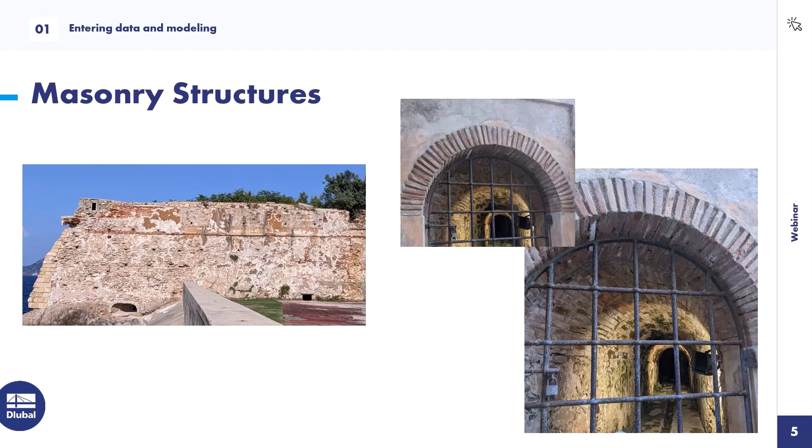This is the reason why I prepared two examples today: one structure as a basement with an arched surface on top, and a second, simpler example of a bridge, where I want to show how you can estimate the maximal possible load on this structure using the stability analysis tool.

That's all for the beginning. So let us start and switch to RFEM.

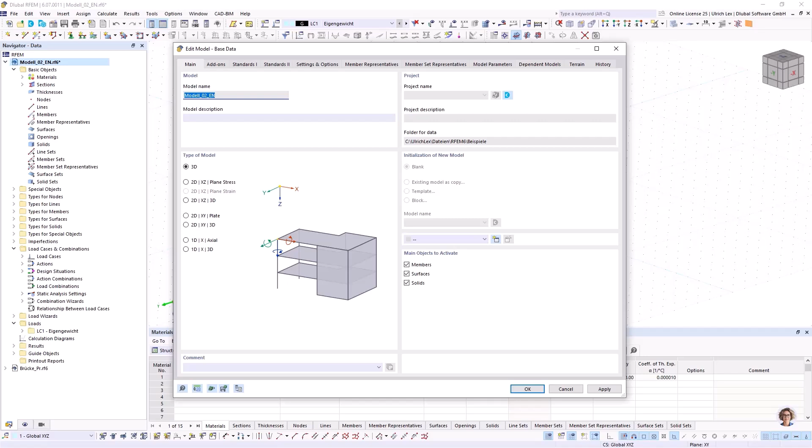I already created a new file in RFEM. The first thing I want to do is take a look at the base data, on the main sheet there are no changes to the default settings. What I want to take a look at is the add-ons. Here I have to check our masonry add-on to get the things I need for masonry.

When I have done this, I can continue with creating new things. At the beginning, I want to create a new material. One material already exists, it's a concrete, and I want to use it for the foundation maybe. The second will be created new. I choose the material type masonry, and here our material model, orthotropic masonry.

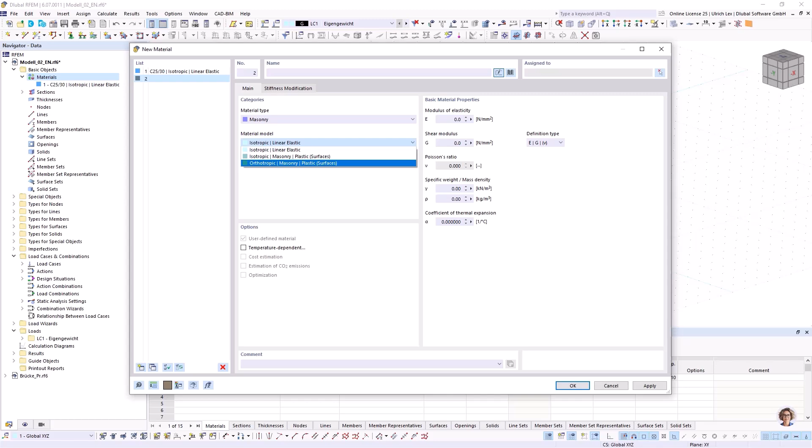Go to the material database, select our masonry, and select one special material. Continue with OK. Then my needed data are filled in automatically, along with the parameters I need for the material model. The first step is done, the material is created.

The second step, I want to create a new thickness for my surface. At first, the foundation, maybe 250 millimeters. Apply, create one new thickness with masonry, and set the thickness. Continue with OK. If I have done these settings, then I can start modeling.

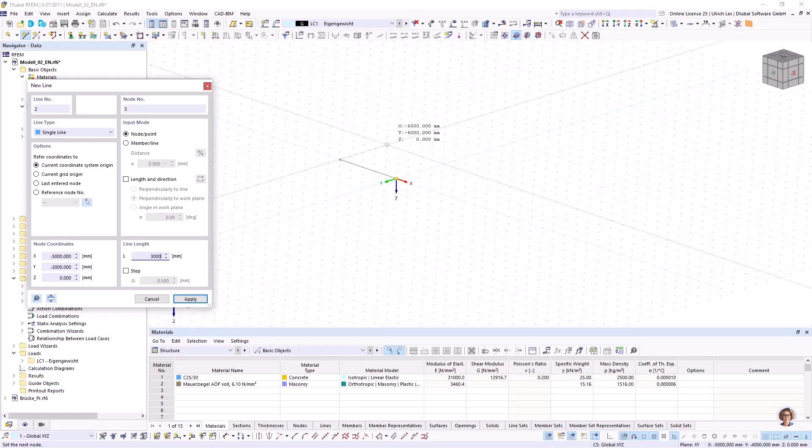My building is very simple, so I can create it only with lines or directly with surfaces, and I don't have to use any data import or DXF file. So I want to start here and have, in this direction, 5000, here 3000 millimeters. I can also change this from millimeter to meter, which is maybe better for bigger buildings.

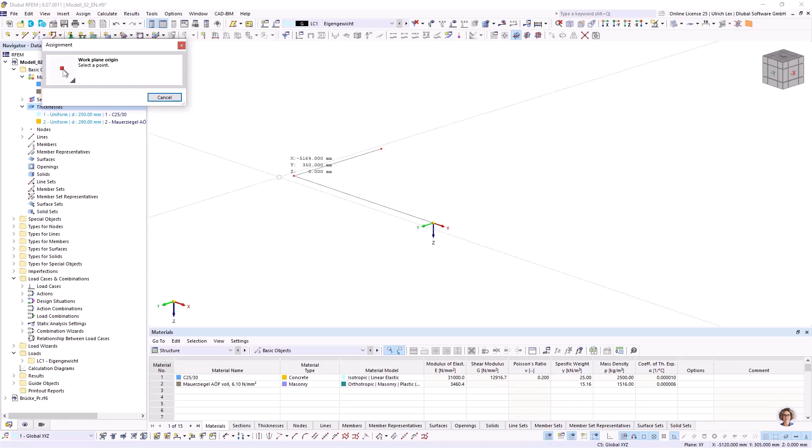So I can copy this line and create the line in the front. I can switch the working plane. I had to change here the settings in options, units, and the length from millimeter to meter.

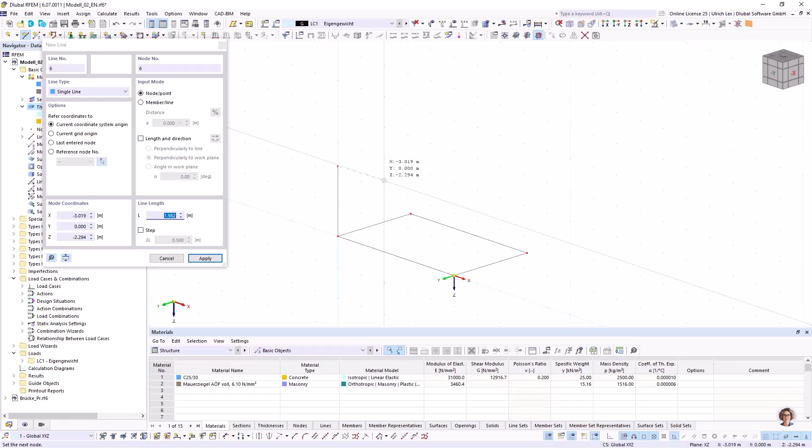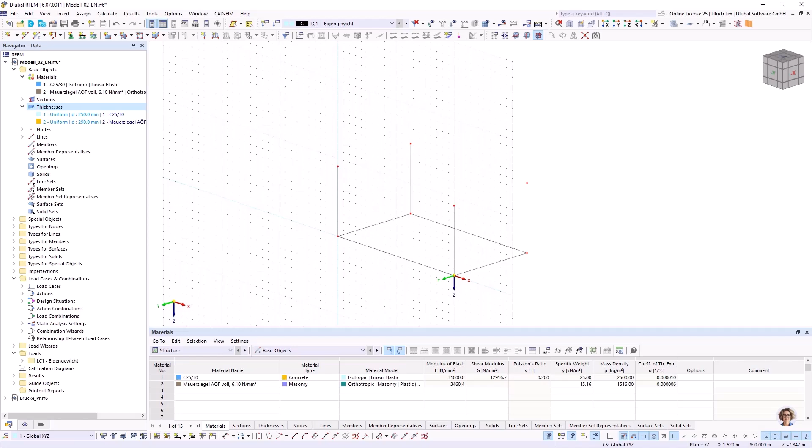Now my spacing is 1 meter. So now I can change it, that was what I wanted. Switch my working plane and want to create here one door.

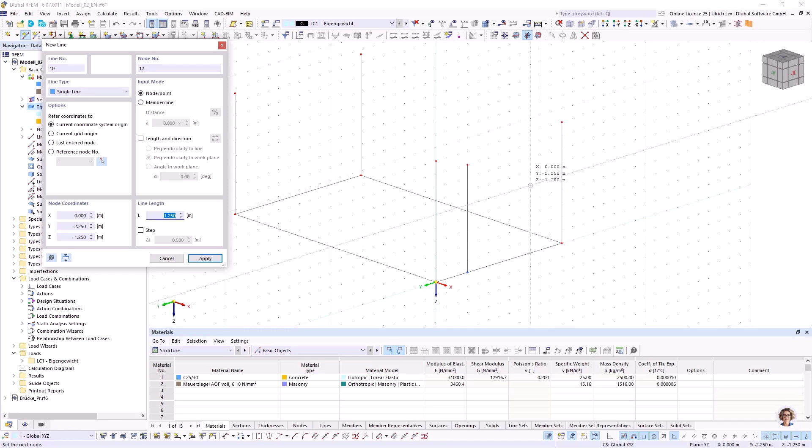For better modeling, I can now select only the lines in the front, and create a new arc.

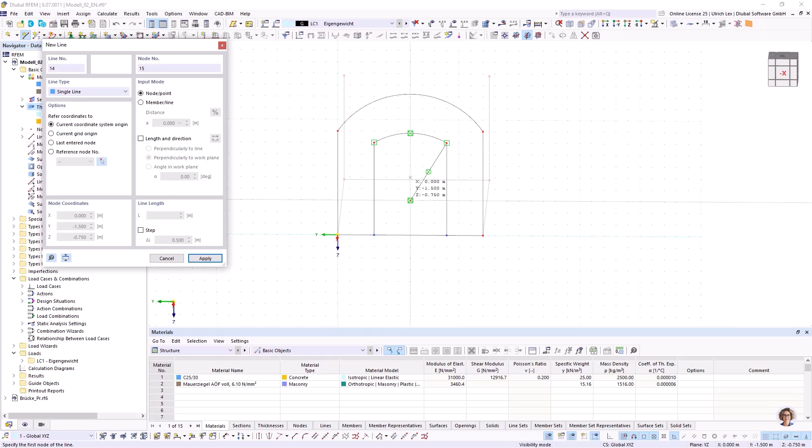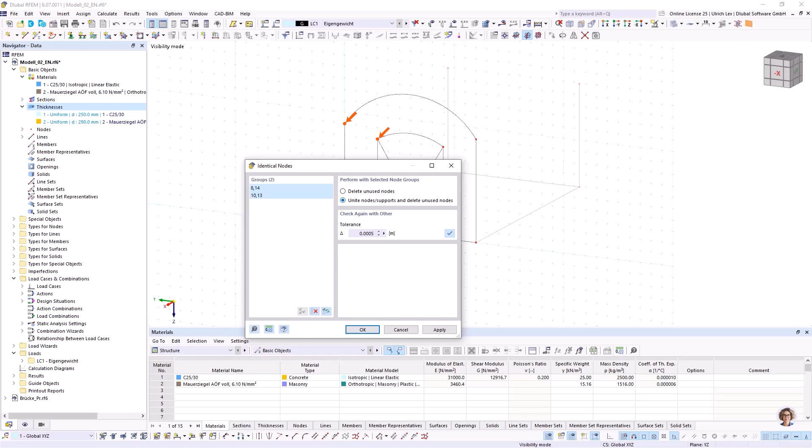Can create here now 2 lines, maybe 2 helper lines. There were created 2 additional nodes. This is not good, so that's why I can use our tool, model check, and look after identical nodes. You see there are 2 nodes here, and I can use this option, delete the unused nodes. Okay, then there is only 1 node.

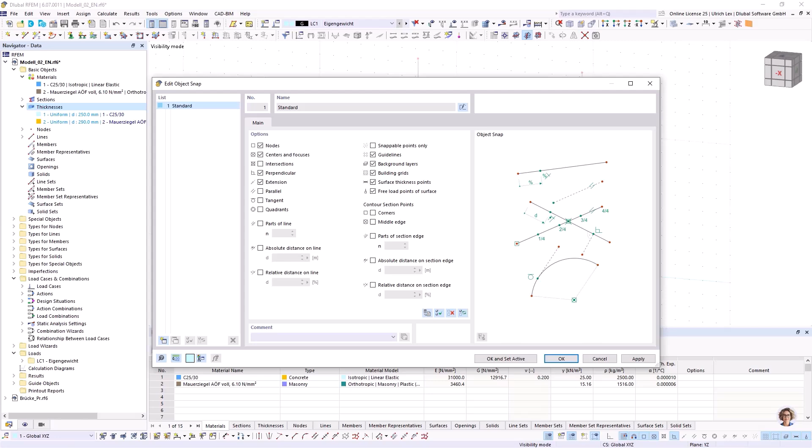Available. Here I created this helper lines. I can activate our extension for lines. Then I can choose this node, go a little bit back. When the yellow cross is coming, then I can extend this line and choose my length. The same on the other side, a little bit back, and extend this line.

And the next steps, I use this arc again. So after this, I can delete my helper lines.

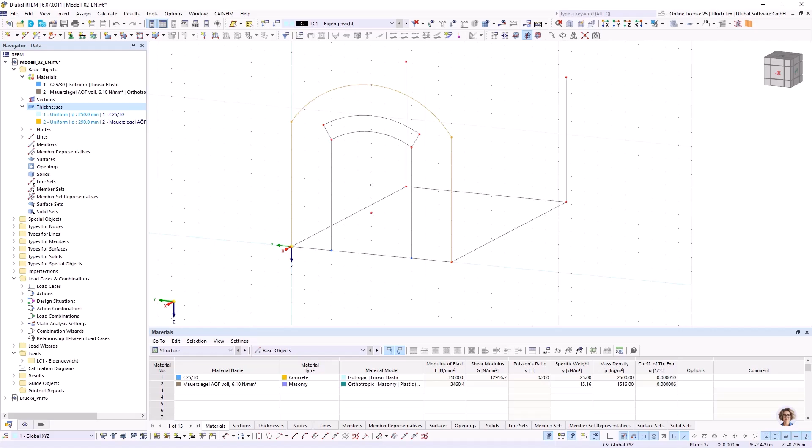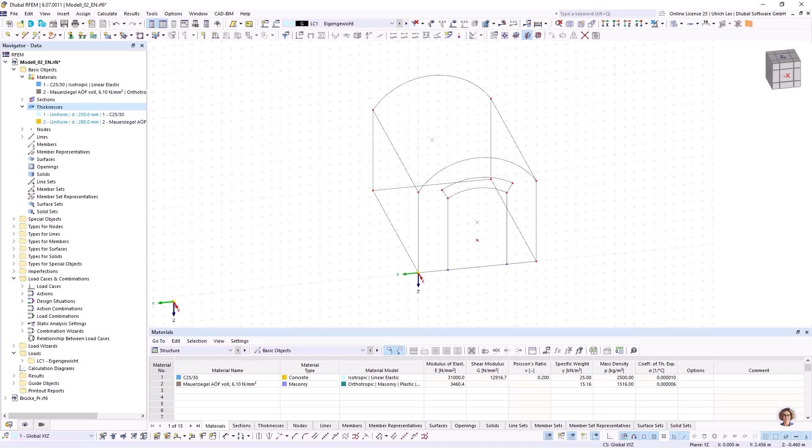So that's easy modeling. I can cancel this visibility mode. I can select the structure and copy it. I can add here some lines. And my easy building is ready. I can save this structure, and after that I will continue with creating

the surfaces. I use here the option select boundary lines because now all boundary lines are available. For my foundation, I use the concrete material. Select here my lines.

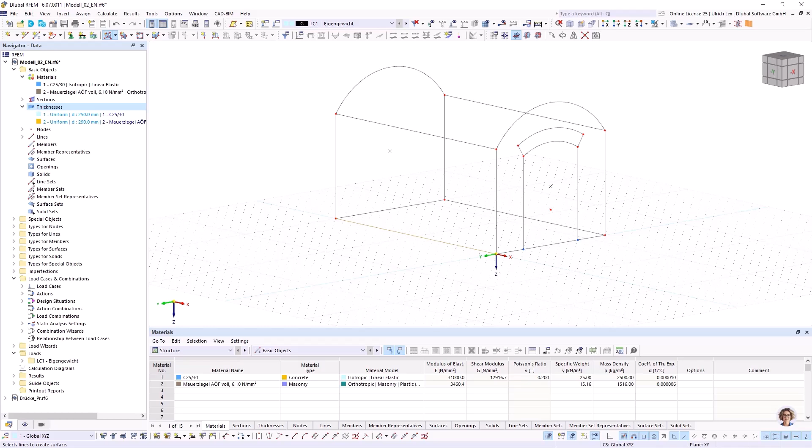So one thing I have seen, here are automatically created nodes on lines. Maybe it would be better to have separate lines, so I can use this option connect lines and nodes. After that, the line is divided and the node is displayed as a red one.

I continue with select boundary lines, choose my thickness for material, masonry, and can create some masonry surfaces in an easy way.

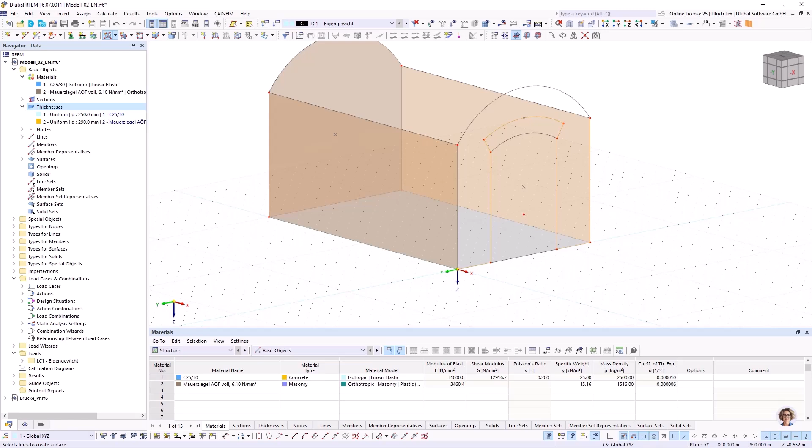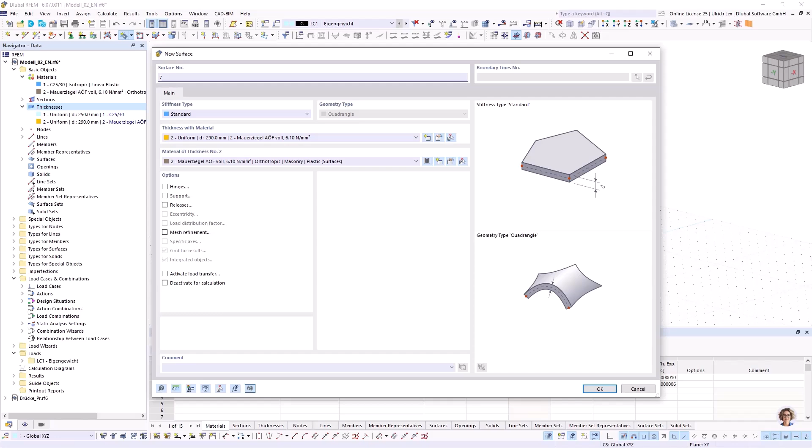So here I want to create a separate surface, and also for the surface on the top I need not a plane surface, I need here a quadrangle surface, also with the thickness of the masonry material. Okay, and choose the boundary lines, and ready is my easy building.

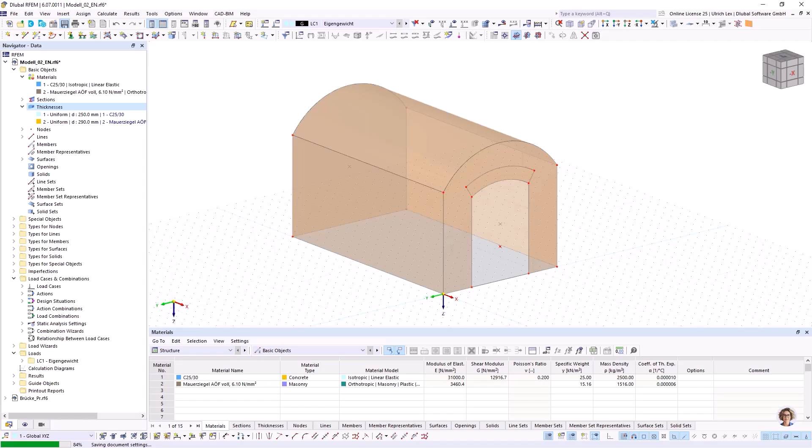So as a next step, I want to take a look at the supports. With double click on the surface, I choose a rigid support.

So a special thing for masonry material is to take a look, one view on the axis systems of the surfaces. For interpreting the results, it would be better that the local Z direction is oriented to the same direction. Maybe it would be good if all surfaces, maybe from the wall, are oriented to the inside of the building or to the outside of the building. So I can explain it later better, because we have here results for the minus side or the plus side, and this is connected to this local Z-axis. So I want to change it, that all Z directions look to the inside of the building.

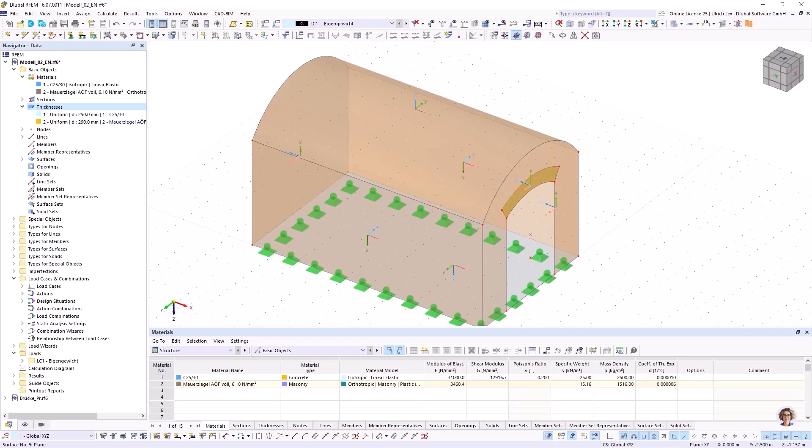Here it's okay. Right click and reverse the local axis system.

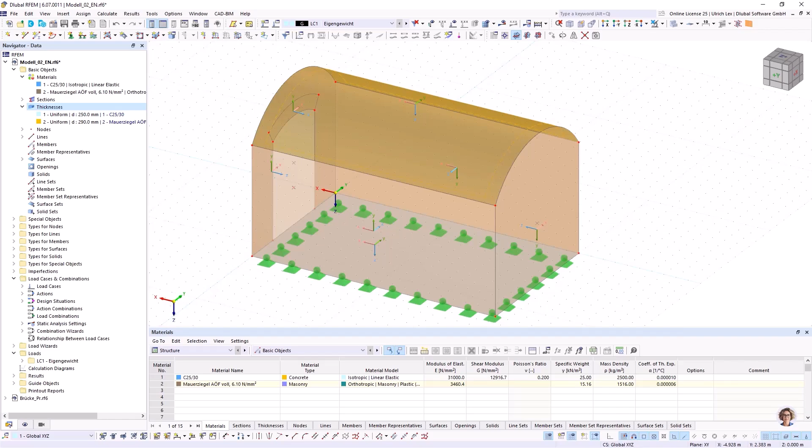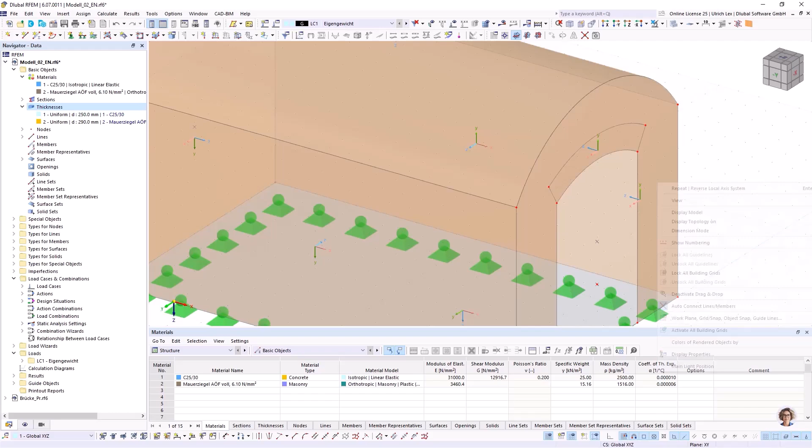And at the last, what's this? Okay. So for this arched opening, it would be good when the y direction of the surface would be oriented to the arch.

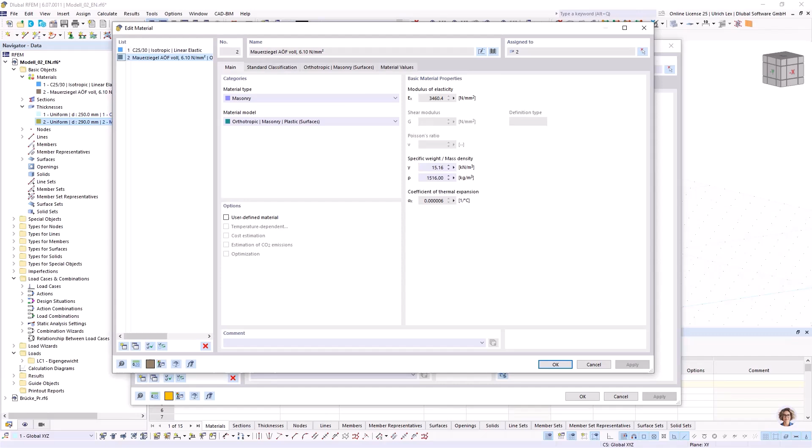This can be done when I go double click on the surface and take a look on this specific axis, input axis, use here axis parallel to lines, can choose my y axis and can define that it should be parallel to this line number 11. It is necessary because the masonry material does have two directions, and the y direction is normally the strongest direction, and this is the direction what the load should be acting.

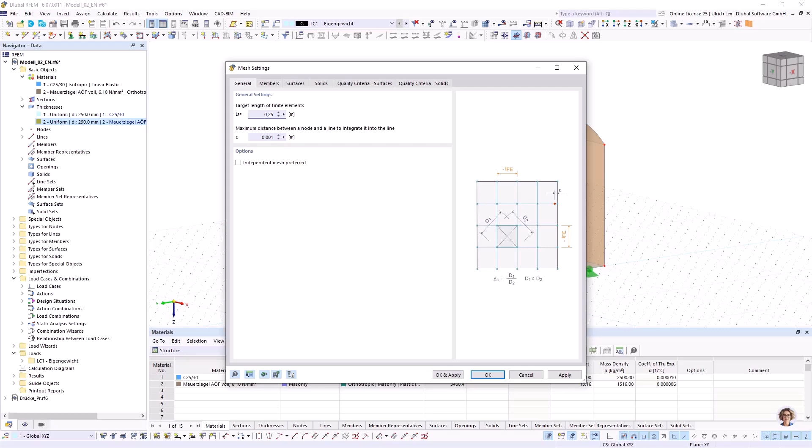Okay, as a next step, we can take a look at the mesh settings. The mesh settings of masonry structures should be around 25 centimeters. Of course, it can be necessary that this length has to be smaller. Then you can use this member or this mesh refinement, or it can be necessary that the mesh is bigger. But normally it should be used about 25 centimeters.

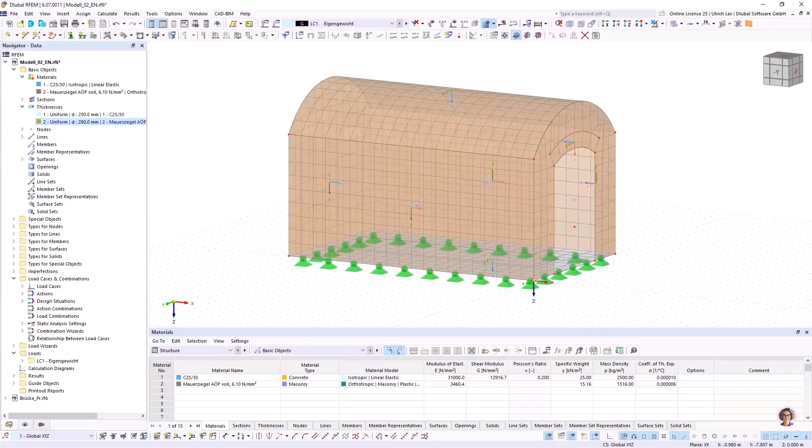Okay, the settings are done, then I can take a look at the mesh. Continue with OK. The mesh will be generated, and the mesh is fine. It's a regular mesh, so I think it is okay for this structure.

Here we see, when I separate this surface, we can see that the y direction is oriented according to line number 11, and it's better to see when I activate the axis system of the FE elements. Then we can see this y direction is oriented according to the line.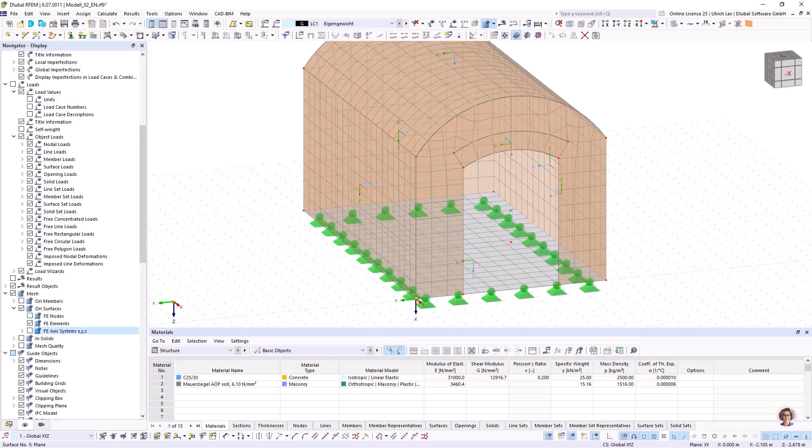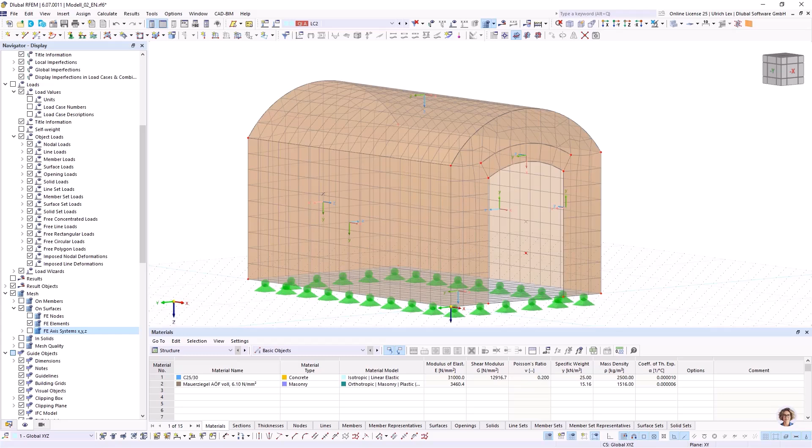Okay, the next step is loading. Here I want to create a second load case. The first load case is my self-weight. As a second load case, I want to create a surface load with 10 kilonewton per square meter acting as projected on an area.

The load combinations are created automatically. Here I want to modify the static analysis settings. For masonry, it's normally used a geometric nonlinear calculation or large deformations.

And it's important to set some load increments so that the whole load is not acting at one load step on the FE element. It's better if you choose here maybe 5 increments. When you want to see the results of each increment, we have the option to save the results, but you have to activate it.

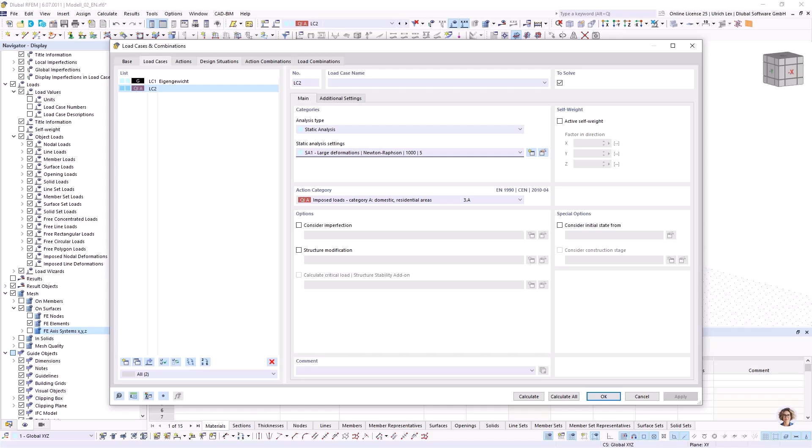Okay, and also we have to set in the combination wizard that we want to use not second order, that we want to use the large deformation analysis. After this setting, we can continue with calculation of the structure. So I press calculation.

At the calculation diagram, you can see the method of analysis, large deformation. You can see the load increments where the solver is computing. You can see this load factor, and in the convergence diagram you see the displacement, the deformation of the system according to the load or load increment.

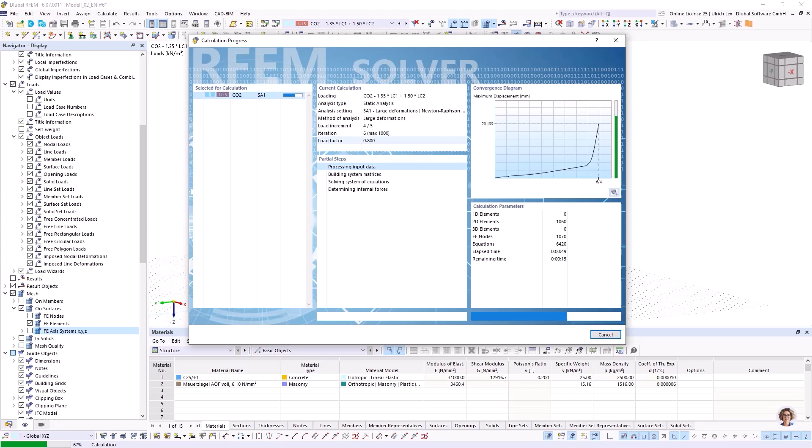Now we can see that the displacement, the deformation is increasing with the load factor, 0.8. We could now wait until the calculation is finished, but it could be that we have to wait a long time and the calculation will not finish. So I will remember 0.8 and will cancel this calculation at this moment.

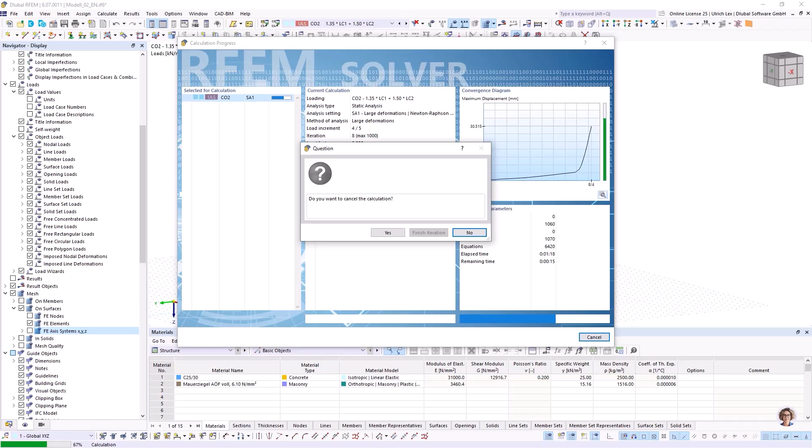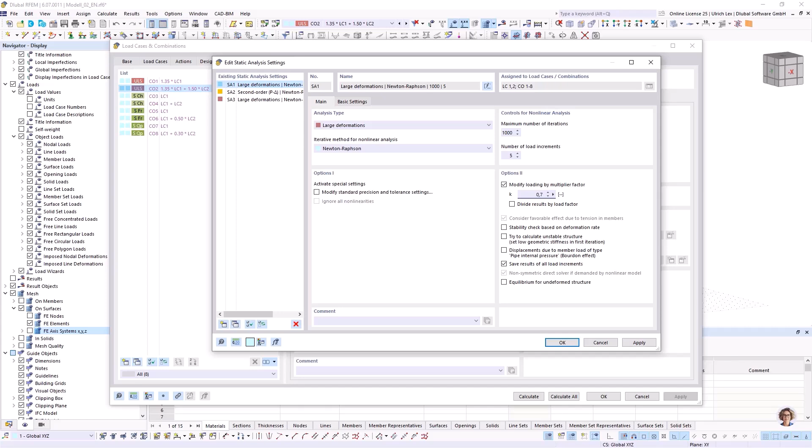What can I do to take a look at the deformations at this load factor? I can go to the load combinations, choose the option in the analysis settings, use this modify loading by factor, and insert here maybe 0.7. Continue with OK and want to calculate the structure again. Then we can take a look at the results after this load factor 0.7.

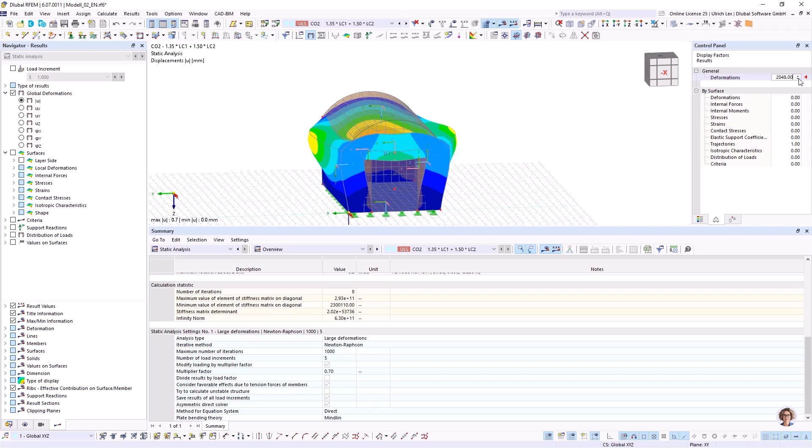What we see now, when we increase the deformations, what is happening? The surfaces on the right and left side get a big deformation. I think it's clear because this arched surface creates some horizontal load, and the masonry on the side surfaces can maybe not handle so big horizontal loads.

So maybe when we have to compute the structure in reality, maybe we have to think now if we forgot something, or what we can do so that it's working again.

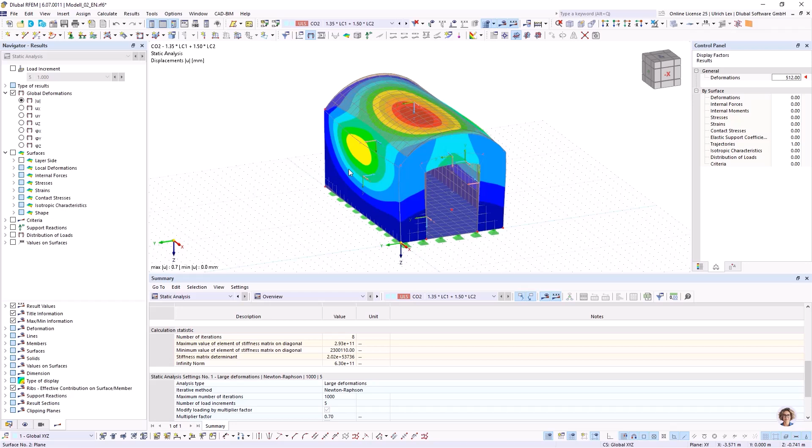There are many possibilities. Maybe we can create a new beam, a concrete beam, like a ring beam on the top of this surface. Maybe you can create some additional concrete column, or what could be done when it is a basement.

It could be maybe considered the earth pressure on the outside of these surfaces. And that was what I want to do.

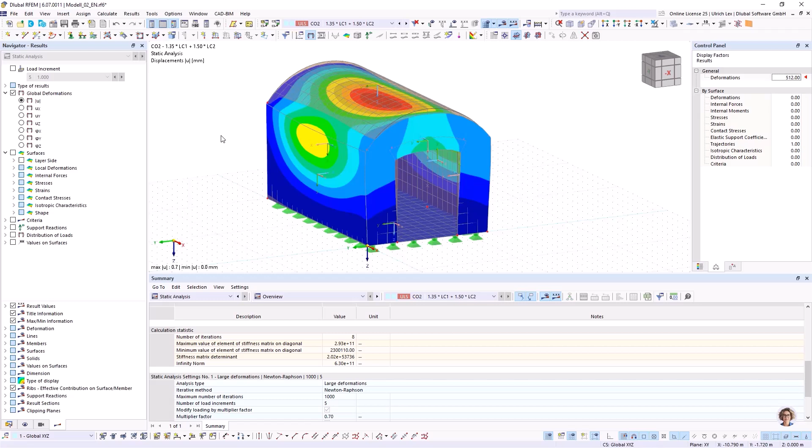Now, with double click, I want to consider some support. I want to create the new supports in local Z direction. Maybe some spring constant. Yes, okay. And the same on the other side.

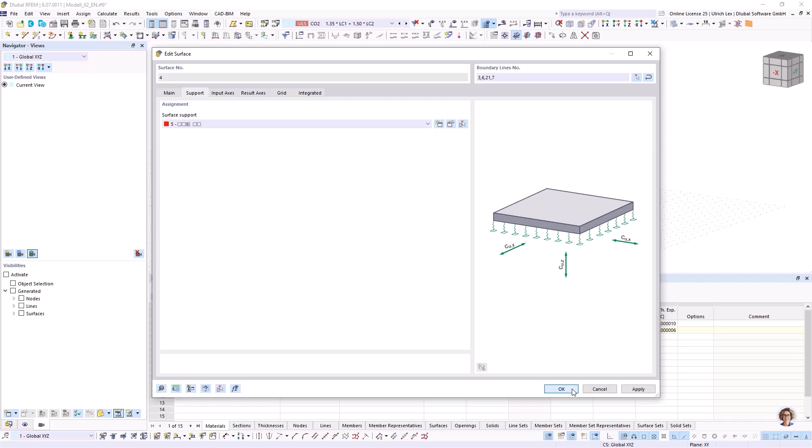I want to change back my factor to 1.0 and calculate the structure again.

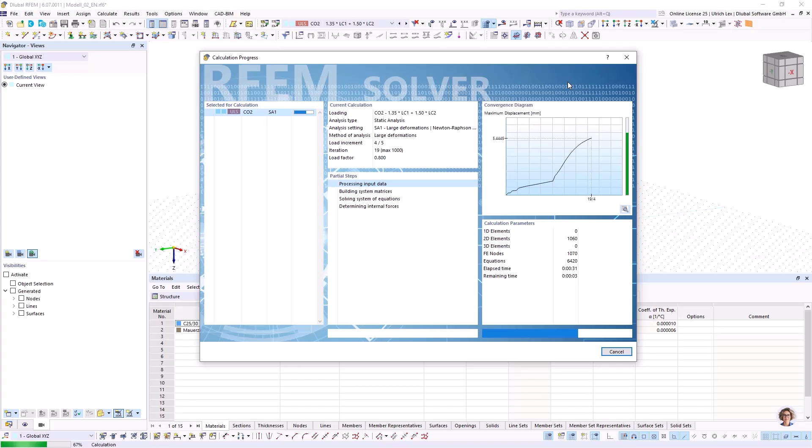Now I can see that the deformation is increasing too, but it's getting horizontal after some time. That means that was the right thing we have done. Here is the last load step, and we got more load, and the deformation is not increasing anymore. So the structure is computed, and this structure is okay for this load which is now computed.

So what can we do now for the result? The first thing is we can take a look at these load increments, but we have done it before.

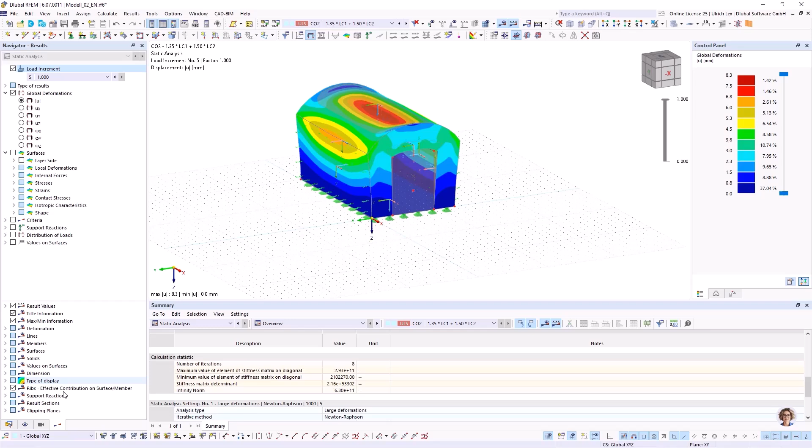One interesting thing is the deformations. These deformations you can also print to the printout report to create maybe a better view. You can insert some guide object and a clipping plane. You can create a new clipping plane here maybe.

Okay, just a moment. We have to see the YZ direction. And you can take off the clipped areas, so you can see this deformation.

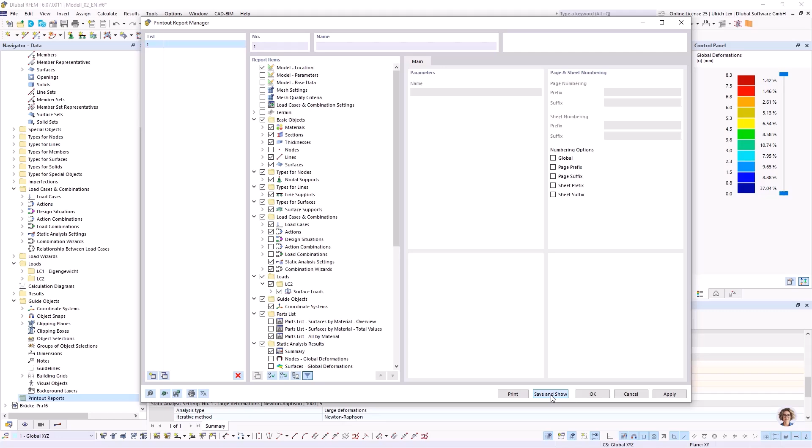We can create here a new printout report. Some tables are activated by default. Here you can activate or deactivate everything you want. Click on Save and Show, and the printout report will be generated.

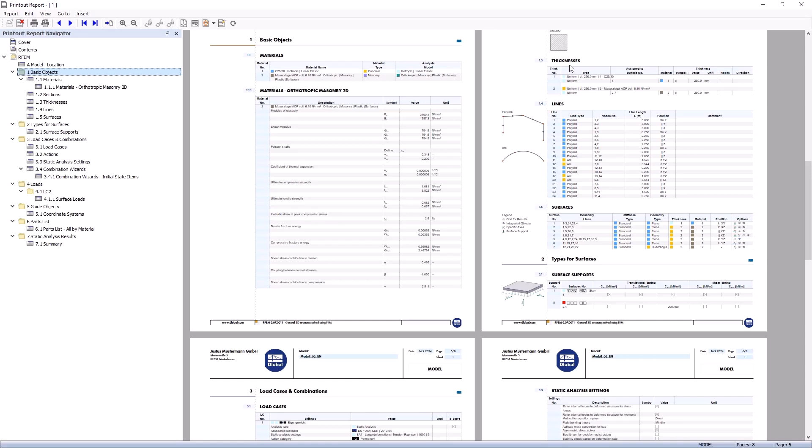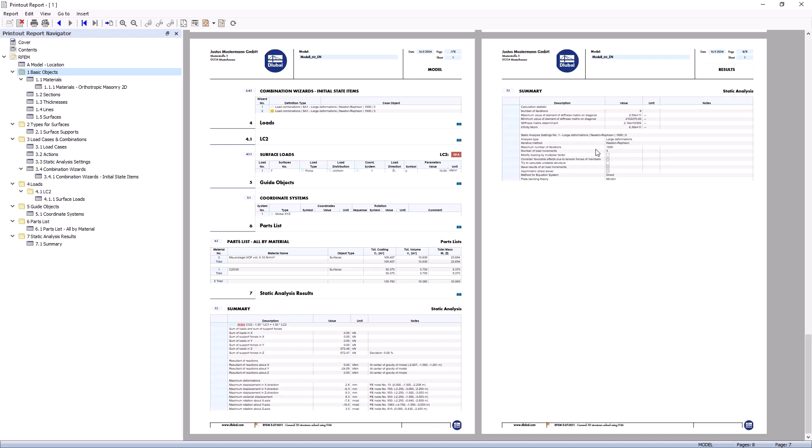Here you have the basic information: materials, thickness, lines, surfaces. You have the information about the load, and you have the information about the static analysis settings. Here you have the information about the calculations, that it was okay. You can additionally print the needed pictures to the printout report, print graphic to printout report.

You can do some settings. Okay, with Save and Show. Then the printout report will be open again, and you have this information in your printout report.

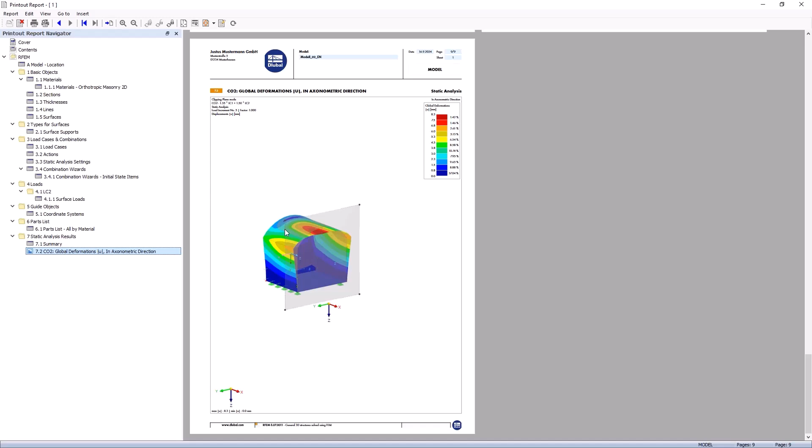So you can easily take the clipping plane off again. What is interesting is always the strains.

The basic strains may be in Y direction, and here we can see these plus and minus results. The plus results are always on the side where the local Z direction is oriented, and the minus side is the opposite. In our case, the results on minus are outside, and the results on plus are inside of the building.

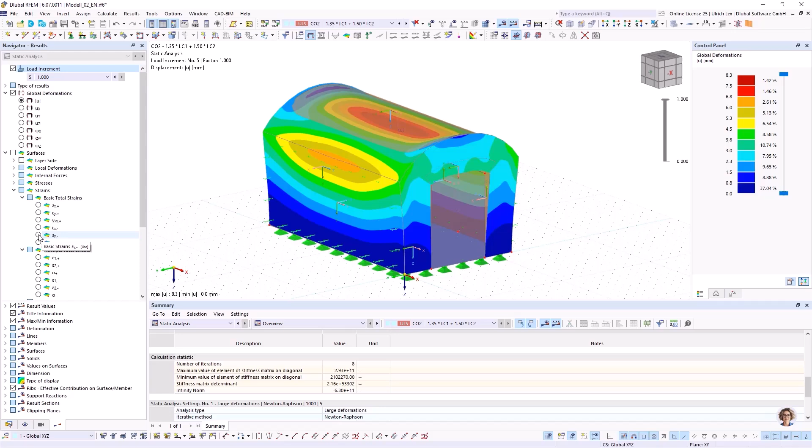When I take a look on these outside results, we can see that here is tension on this edge, and also on the inner side it is tension on the top of the surface. These results are as expected, I would say.

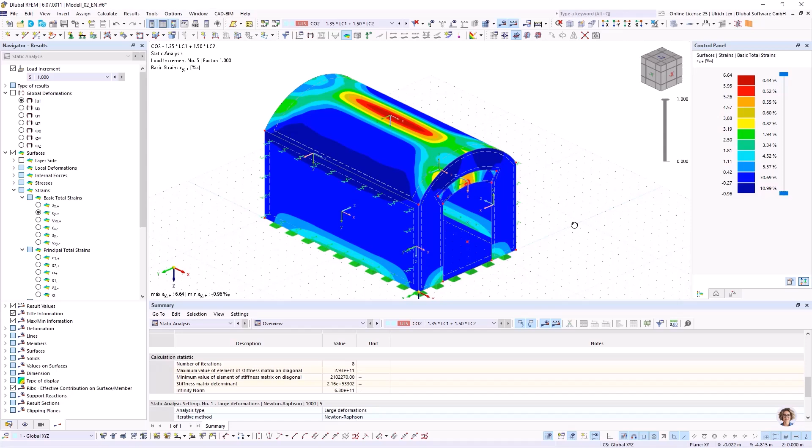Okay, when I take a look now on the outside and inside results on the same place, then you can see if there is a crack through the whole surface. But in our case, on the edge, on the inner side, it's a pressure, and only on the outside is tension.

That was all I want to say to this example, and I want to switch to the next one.

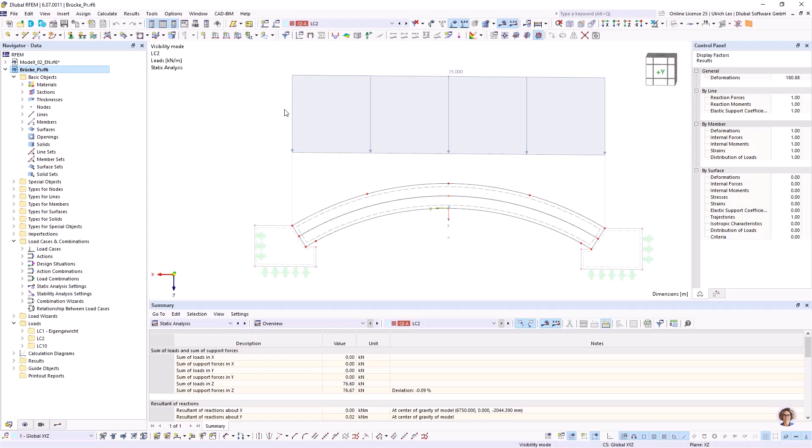Here I already created the file so that we do not have to model it. I created here something like a small bridge, I would say.

I have my arched structure on the side, some supports. In the middle of the surface, I create a result beam so that I can take a look on the normal forces in the arched structure.

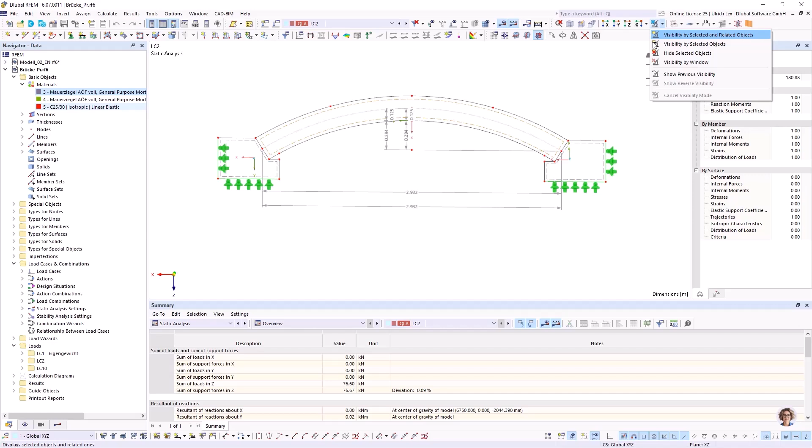As material, I used the same as before for both things. Here, just a moment, I switch off the member. The same material for both things. It's masonry.

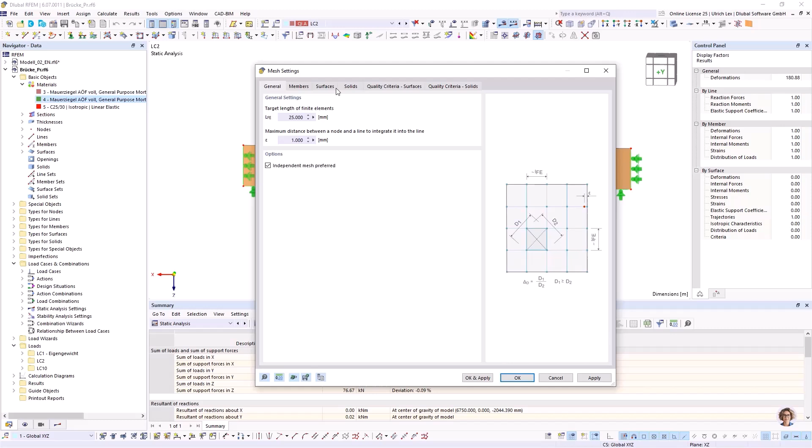For the mesh settings, I use now a very small mesh because I want to see some more details on the mesh, and I used it - it is now created as a section. So I have the thickness of the surface is in Y direction.

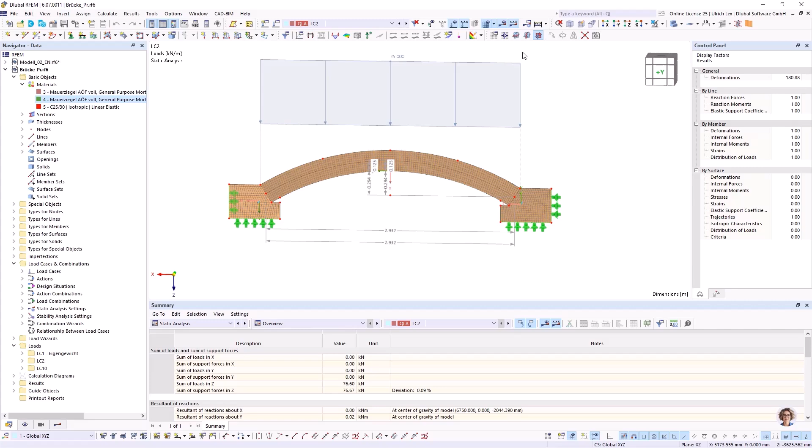As a load, I created only the same load cases, here with a load of 25 kilonewton per meter. So when I create this mesh, we can see that we have a lot of FE elements through the thickness of the surface. When I go back to my model before...

Here we have normally 9 layers through the thickness of the surface. When we take a look on the thickness, then we have 9 layers through the thickness, but we cannot show the results of each layer. We get only results on the outside, on the inside of the surface.

If it is necessary to increase this number of layers, we have this option to do it in the thickness. We can select this option and we can increase this number of layers from 9 to a higher number. But I think the default setting of 9 is okay, only in cases where I have a really thick surface, then you could think about increasing this option here.

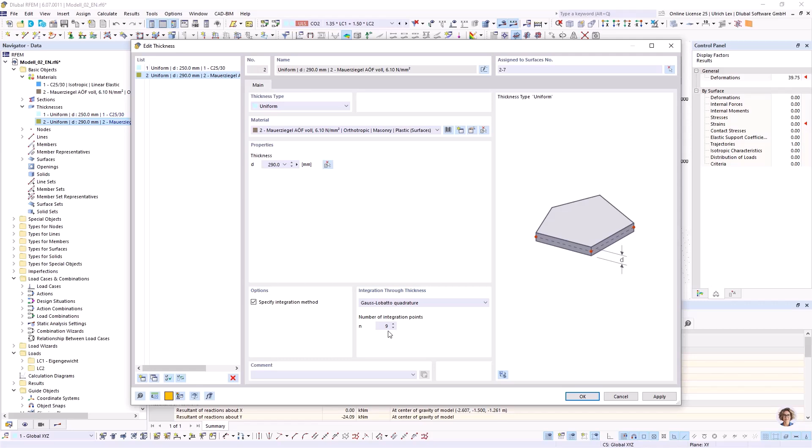So here I have this 25 as loading, my 25 kilonewton per meter. Then I want to know how much load is possible on my structure. That's why I used, in this case, a stability analysis too.

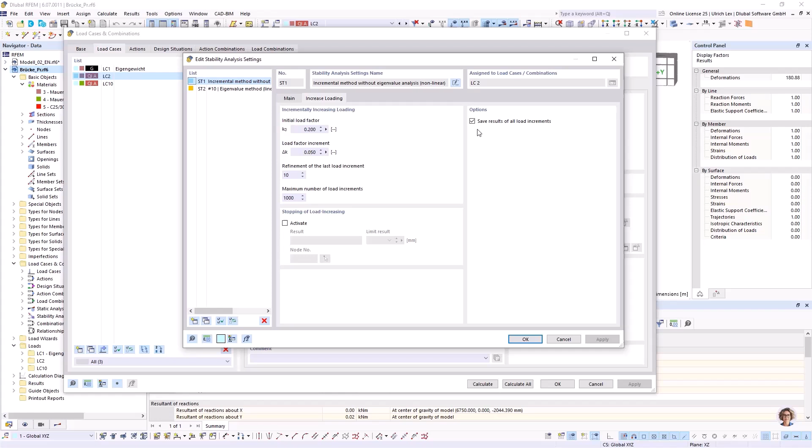I want to use the stability analysis and the incremental method. I want to increase the loading until the structure falls, and to see the results in each load step, I save the results of increments again.

If I compute this - I have done it before because this incremental load increase takes some time. But when I have computed it and take a look on the result, then I see that it is possible to increase my load with the factor 2.9.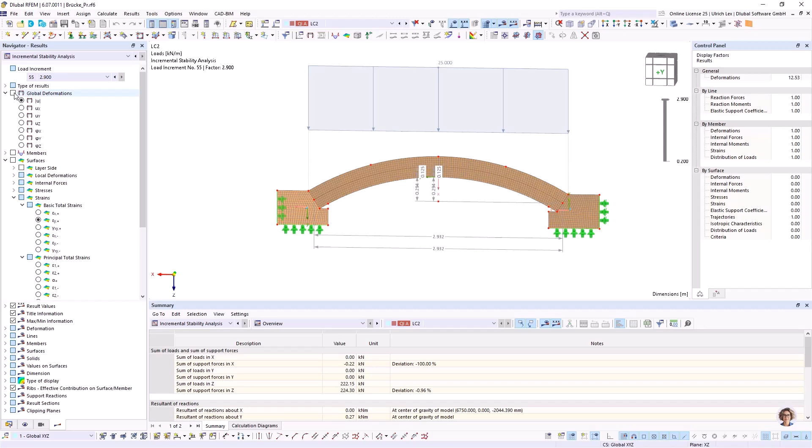And here I can take a look on my deformations. So when I go a little bit to the theory, I want to switch to my presentation.

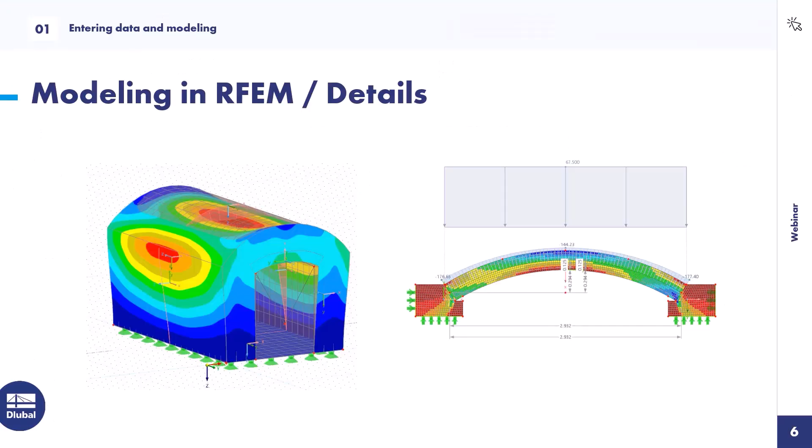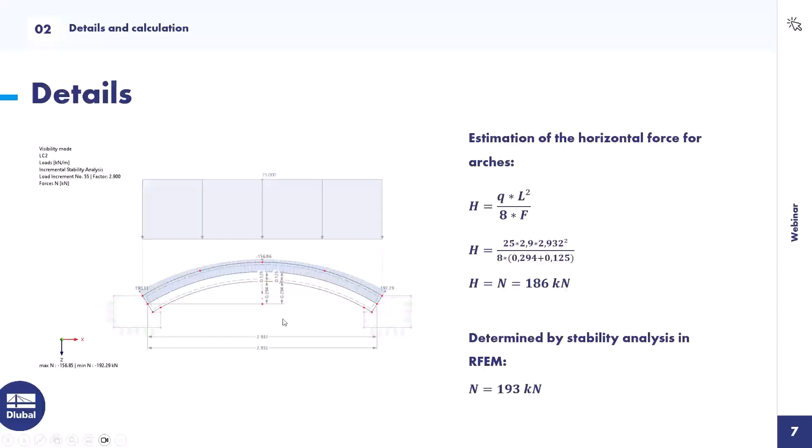It is possible to estimate the horizontal force or the maximum horizontal force for such arches by this formula. The horizontal load is the load Q normal times the length divided by 8f. F is the height of the arch, and I get with this formula about 186 kilonewton. In my case, I get by the stability analysis about 193 kilonewtons. That shows that the analytical solution is nearly the same as the computer calculation in RFEM. So I think it's a very good result of both ways.

I can here show the member force on my result beam and have about 193 kilonewton.

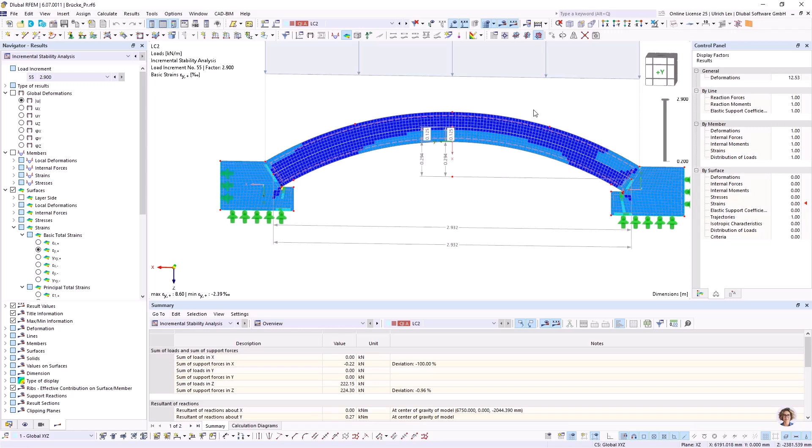So what is interesting again on the surface results? On the surface results, can we take a look at maybe first at the stresses. When I look at the sigma y stresses, I see a maximum tension of 0.098.

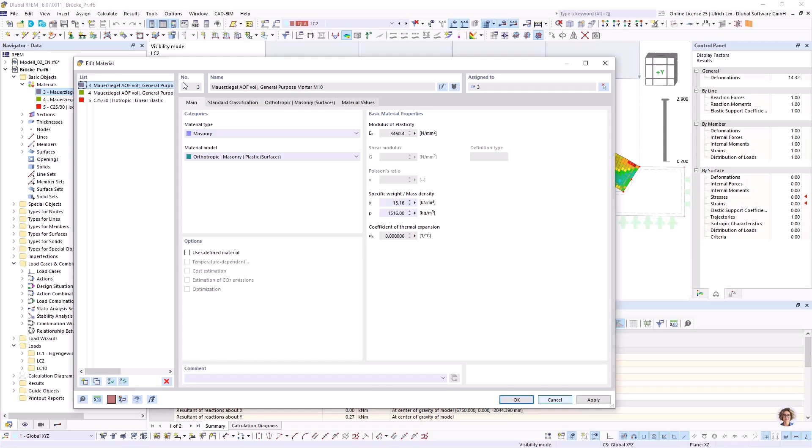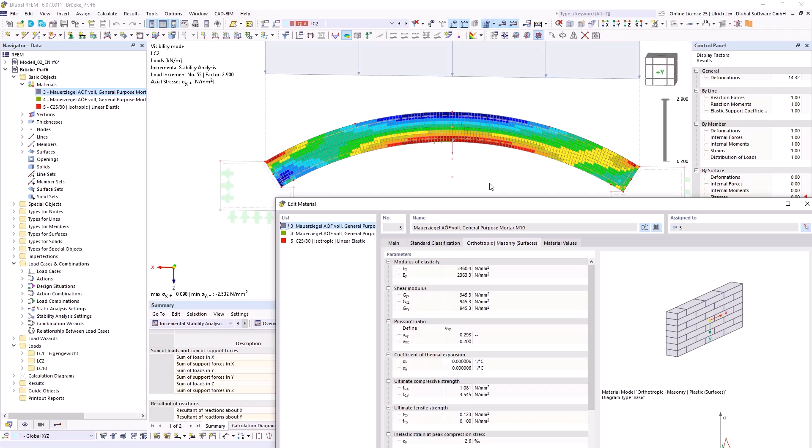When I take now a look on my material, then I can see that the maximum allowable stress is 0.1. So that's why the stresses are not so interesting, because the stresses cannot be higher than it is defined by the material. And if they are higher in the structure, then the calculation will fail and you are not able to compute the structure.

That's why the more interesting things are the strains. And here I can take a look on the epsilon y strains, and we can see that here on the downside are tension strains, and also here on the upside.

For documentation, can we now say, okay, here one FE element is about 25 millimeters. Maybe I have here 50 millimeters, 5 centimeters, where I have a tension, where I think cracks are possible, and the rest of the structure is pressure. I can maybe here about 200 millimeters is pressure. And this is information where we can say, okay, this structure is okay or not.

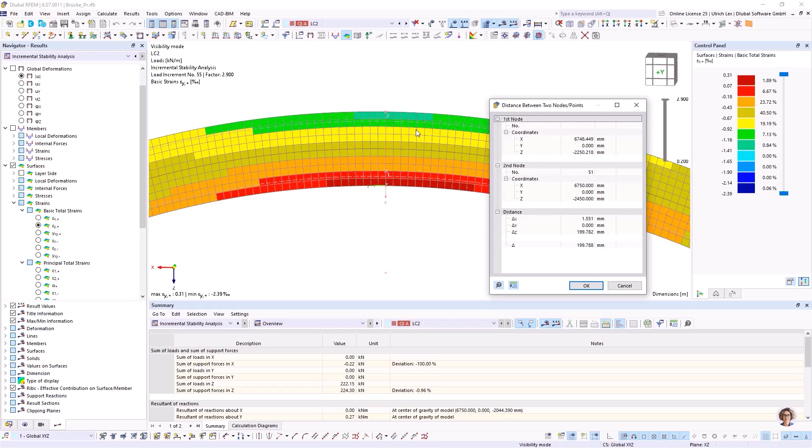So these things you can, as mentioned before, print in the printout report for documentation and to print the results of it.

One option or one thing what I want to show you is, as I said, this stability analysis takes sometimes a longer time to compute. When I take a look on the calculation diagrams, you can see that the load is increasing until the structure fails. Here is a refinement of the last load step.

So this takes a little bit of time. If you know about this load factor, you can use again this option in the static analysis settings to modify your factor. Maybe you use a higher load increment. Then you can do some tests, and the calculation does not take so much time.

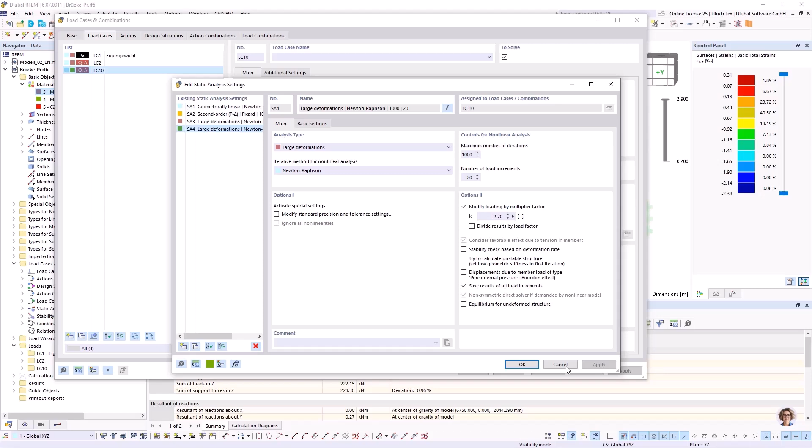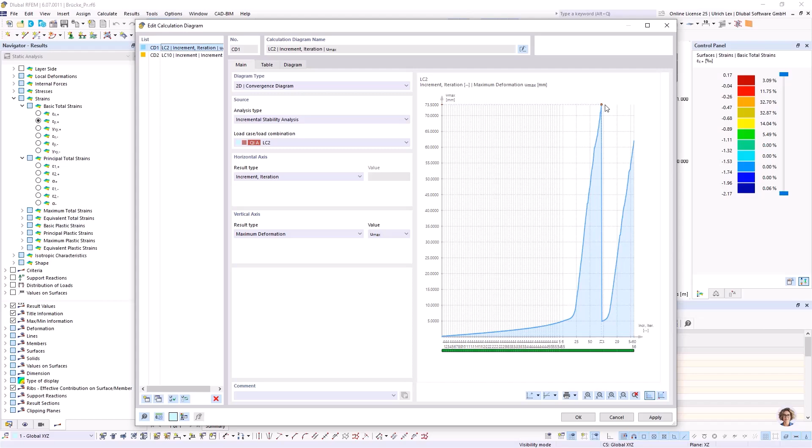Because when I take a look on this calculation diagram, I have to create a new one, because I do not have this increment, and I do not have this refinement at the end, the solver does not have to compute it in the last detail.

It's maybe easier to use such a modification, and only in the last step, when I know the calculation is ready or the system is ready, then I can use this incremental load increasing.